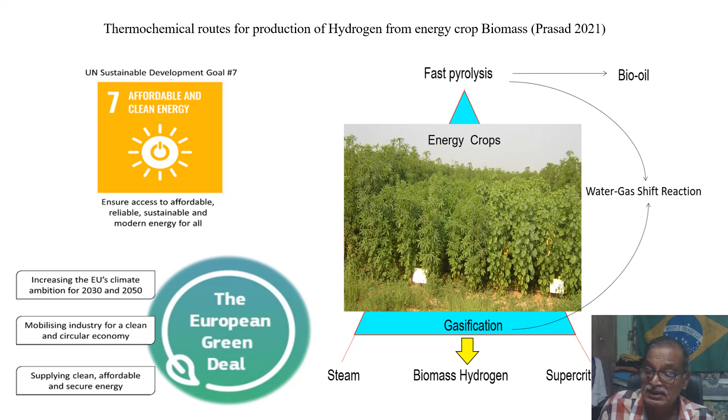Mobilizing the industry for clean and circular economy, and supplying clean and affordable secure energy, either biogas, compressed natural gas, or biogas based power plants. Phase out the usage of coal and fossil fuels gradually, and bring in non-conventional energy sources. These are some of the options for reducing greenhouse gases.

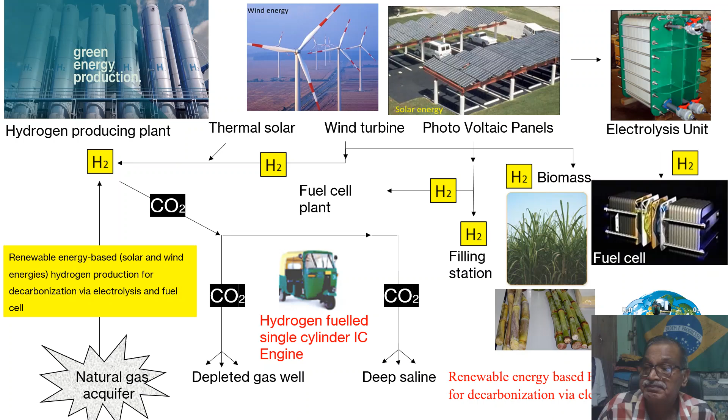The renewable energy produced, especially hydrogen, is the major source and hope for decarbonization, and several countries are forging ahead. So this is how it works: you have wind turbines, thermal solar systems, biomass based fuels, photovoltaic panels, water, and hydroelectric projects, and so on.

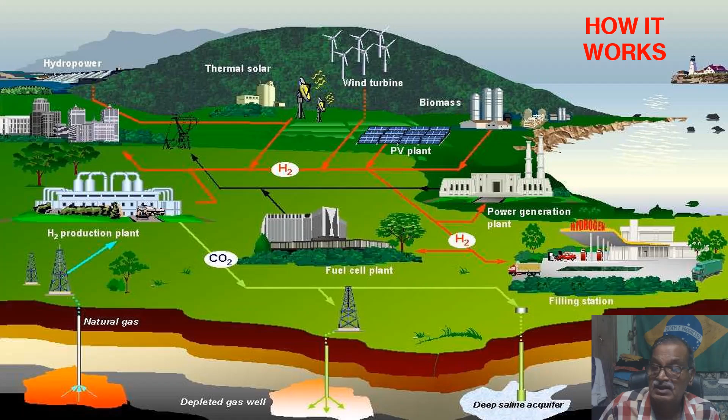The hydrogen produced by various routes is classified on a color code scale. We have black hydrogen, primarily produced from anthracite coal by gasification; brown hydrogen from lignite without carbon capture, utilization and storage; gray hydrogen from methane steam reforming; blue hydrogen also from the methane steam reforming process; and green hydrogen produced from water electrolysis with renewable power; white hydrogen from geological reactions, a natural process; turquoise hydrogen produced from methane pyrolysis.

Moss hydrogen is produced from biomass via reforming, anaerobic digestion, or gasification of waste. We have plastic waste generated in large quantities today. The problem, the global problem of plastic waste, is enormous. What we have is the Mission Starfish, where the oceans are loaded with plastics of wide variety that we use. This microplastics problem is a major threat bringing so many catastrophes.

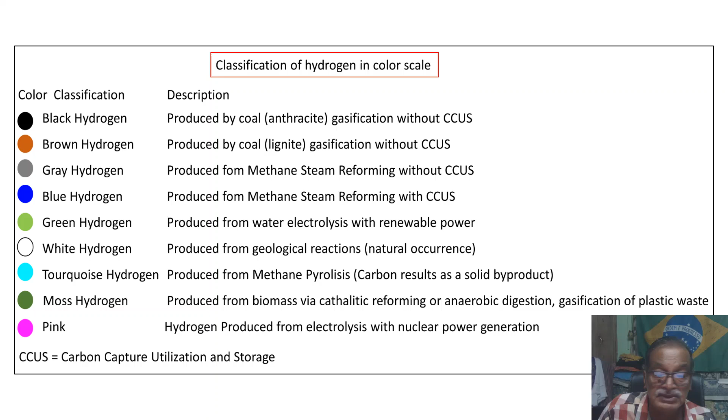Pink hydrogen is produced from electrolysis with nuclear power. This abbreviation, CCUS, stands for carbon capture, utilization, and storage. COP29 was held in Baku, Azerbaijan, November 2024, where the role of hydrogen in decarbonization was highlighted.

These are the plants. I have a small video which I will show at the end. Baku is a well developed technology hub. I happened to be in this town, Baku, some years ago.

The Indian government had an ambitious program of running the Indian railway network with hydrogen, and they initiated a major program. In December 2024, India launched a train for a trial run for a short distance of about 90 kilometers in the northern part of India, from Jind to Sonepat. This was a success, and gradually they want to run it on several routes.

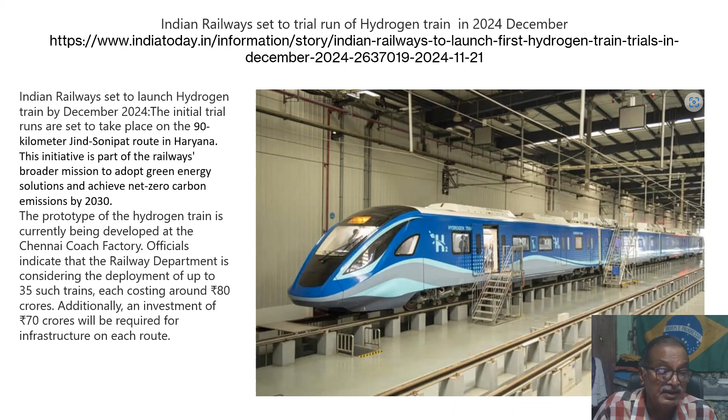The Indian Railways network is very vast, probably one of the largest in the world, and significant investments have been made for use of hydrogen in the Indian railway energy sector. Hydrogen production is a reliable tool for clean technologies through electrolysis or steam methane reforming, including biogas and biomass gasification.

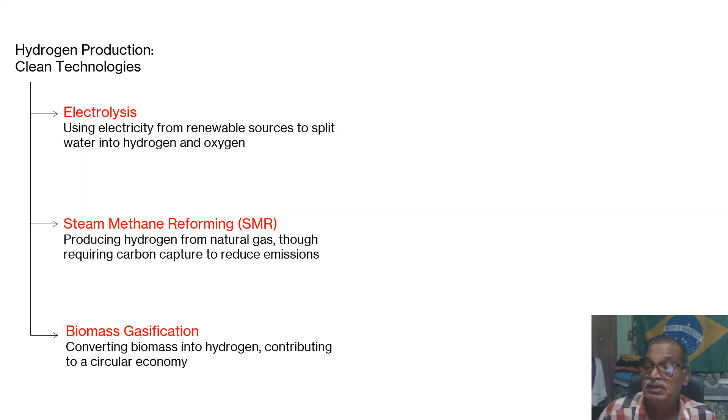Several countries have initiated pilot plants two decades ago: Turkey, China, Argentina, and some islands surrounding Turkey, Korea, India, Libya, Portugal, Azerbaijan, Morocco, Romania, and so on. These projects have given us very useful information on cost benefit economics, training manpower, and so on.

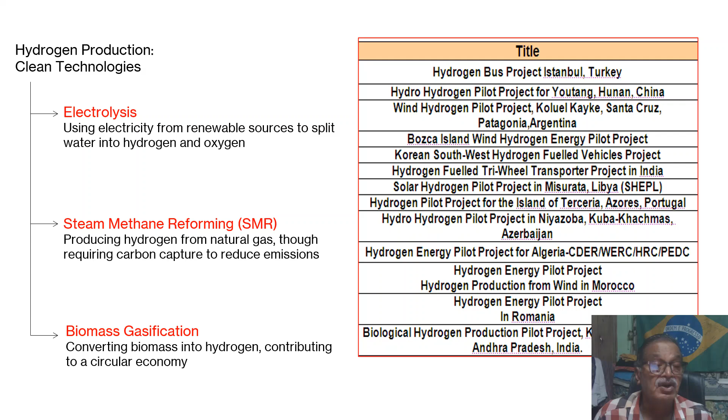The Paris Agreement of 2015 proposed carbon markets, however these rules are to be approved in the coming COPs, the modalities for implementing carbon markets and so on. Hydrogen storage and transportation is also a big challenge.

Once it becomes operational, there will be significant development for controlling emissions and also achieving sustainability.